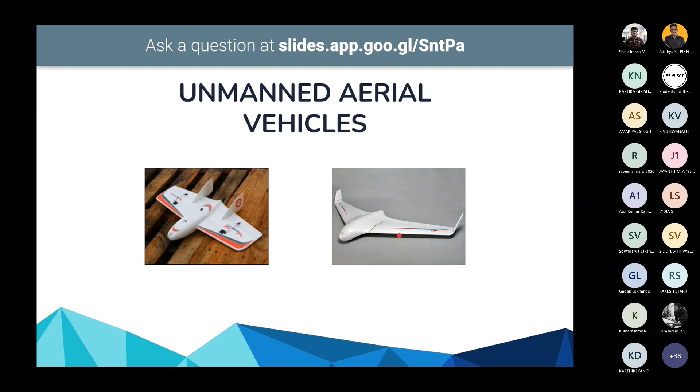Moving on from fixed wing designs, there are multi-copter designs, and this is what we specialize in. So a multi-copter design consists of multiple motors pointing upwards to generate thrust. So just like fixed wings, there are many variations of these designs. I can increase or decrease the number of motors. I could have 8 motors, I could have 4, maybe 3 also. And you can also change the arrangement of the motors.

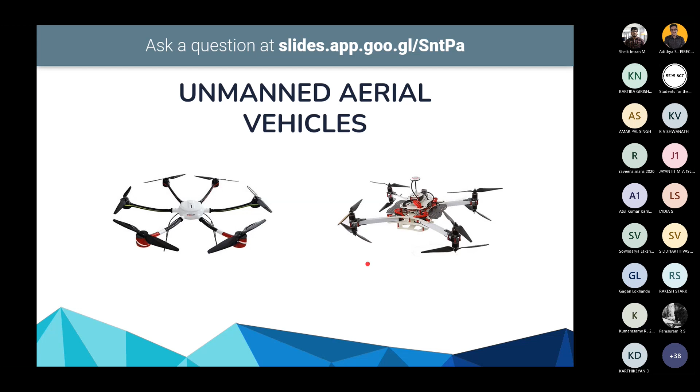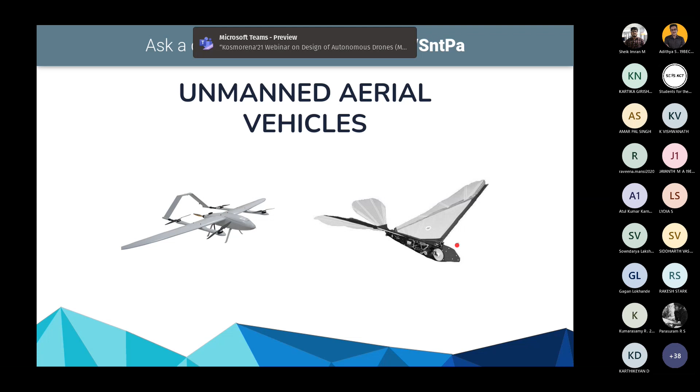There are other designs too, like RC helicopters, for example, which are very popular. They're essentially single copter drones, and they use a tail rotor to stabilize themselves in flight. And on the right, this is something I found really interesting. It's an image which looks like a bird, and this is called an ornithopter. So it's a lightweight craft which flies by flapping its wings. So just like this design here, there are many miscellaneous designs you can come up with for fun.

All right, so let's start to understand how multi-copter systems work and how we could build one. So let's start with the basics. Let's begin with the frame of a drone. So when we build a drone, we need to understand what we're building the drone for. So someone may want to build a drone to participate in races. Maybe they want to perform acrobatics or stunts in air. Maybe they just want a powerful drone to carry a camera with a gimbal for photography purposes. So each purpose will require a specific frame design.

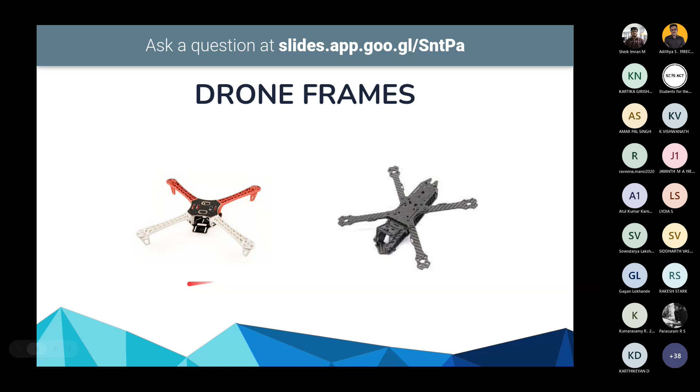So racing and freestyle drones tend to be smaller, and FPV drones, or first-person view drones, they can vary in size based on the camera being used. And then for larger setups where we use a larger camera and we need a heavy gimbal, we will need more powerful drones with larger frames. So commonly we build either quadcopters, hexacopters, or octocopters. Now their names reflect the number of motors present on the drone. So quad having 4, hexa having 6, and octo having 8.

So the main factors you want to consider when choosing from any of these frames are the drone weight, the battery weight, the payload weight, or the required flight time. So you have to try and balance these 4 parameters, and you have to see which works best for you. So let's look at octocopters. Octocopters offer a serious amount of lift. So because they have 8 motors present on them, this means you can lift a larger payload. But because the number of motors is higher, it means that the battery has to be more powerful and will be heavier. Additionally, the frame will also be larger, and that increases the weight of the drone.

Quadcopters, on the other hand, can be much smaller and much more agile. But again, the decrease in number of motors means the payload they can carry is much less. Individual skill is also something you should consider when you're picking a frame. So if you're not comfortable with your soldering and assembling skills, you should avoid using smaller frames, because when you're working in smaller and smaller frames, you're packing all the components present on the drone really close to each other. So that means you have to be very confident in your skills to assemble it properly.

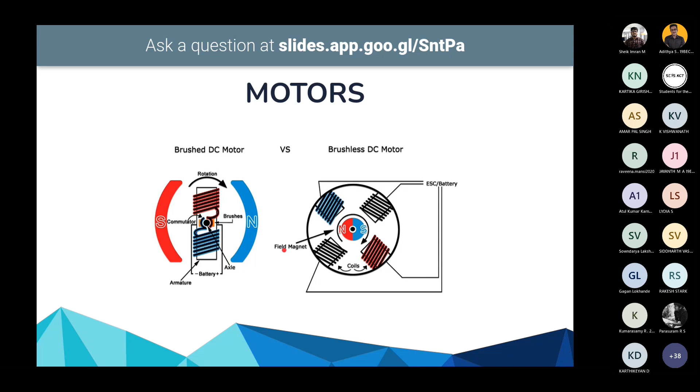So what's the difference between these two kinds of motors? Right now I have an animation of a brushed DC motor. As you can see here, in the brushed DC motor, there's going to be an armature which is rotating, which has coils wound around it. There's a commutator in the middle, which acts as a mechanical switch. We'll talk about this in a few seconds. There are brushes which connect the power supply to the commutator.

So what happens is when we supply power to the armature, a magnetic field is created and it begins to rotate. But at a certain point, it's going to stop rotating, and we need to ensure that we change the polarity, the current here in the armature. And that's why we use this commutator. It acts as a mechanical switch. So to ensure the full rotation happens, the commutator has a small split in between, and across that is where the polarity changes.

In a brushless motor, however, the rotor, which is the part of the motor which moves, is in the center here, and it has two permanent magnets around it. These permanent magnets are surrounded by multiple windings. For this demonstration, there are 3 windings, but in actual brushless or BLDC motors, you'll notice there are many more windings. BLDC motors are controlled by something called 3-phase power.

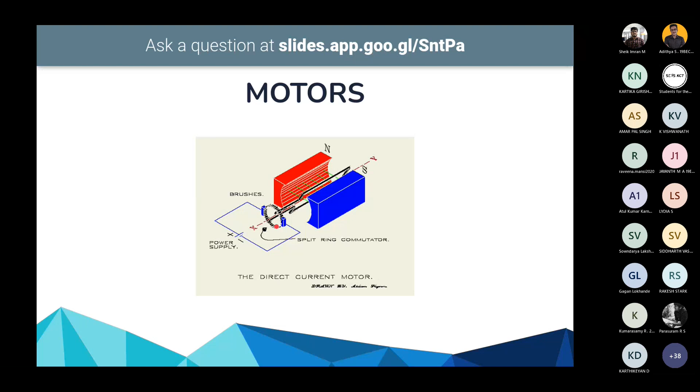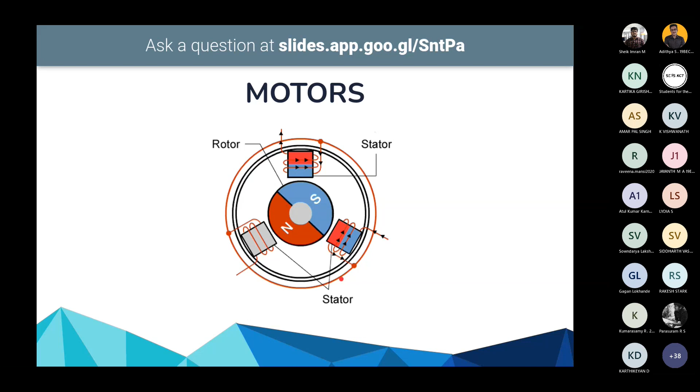With the absence of brushes, it also means that brushless motors will be more efficient. There are no sparks present, and the noise produced is also less. So therefore, we always go for BLDC motors, unless we're building really tiny drones. In such cases, we can see cheaper brushed motors being used. But when we're looking at BLDC motors, how do we compare them? How do we know which one's the best fit for our drone?

That's determined by something known as KV, or the velocity constant. The velocity constant tells us how much RPM we're going to get out of a motor. For example, let's say I have a motor with a KV of 2000, and I connect a battery of 10 volts to the motor. If you simply multiply these 2 numbers, you're going to get the output RPM. So for a KV of 2000 and a supply voltage of 10 volts, we're going to get an RPM of 20,000. And that's really high.

That's because this formula will give you the output RPM when there's no load connected to the motor. No load means that there's no propeller attached to the motor. It's just simply spinning the rotor. If we do attach a propeller, you'll notice that the RPM will decrease sharply. So the higher the KV, the velocity constant, the higher the current draw of the motor and the lower the efficiency. But how do we know which KV range to go for?

That depends on the number of motors on your drone. For quadcopters and tricopters, which have 4 and 3 motors respectively, you need a motor which has a high KV. But as you're working with drones with a larger number of motors, so hexacopters and octocopters, you can go for motors with a lower KV, because the motors can compensate for each other. Motors with a lower KV run at a slower RPM, but that means they can generate more thrust if you use a larger propeller. And motors with a higher KV are more suited for smaller propellers.

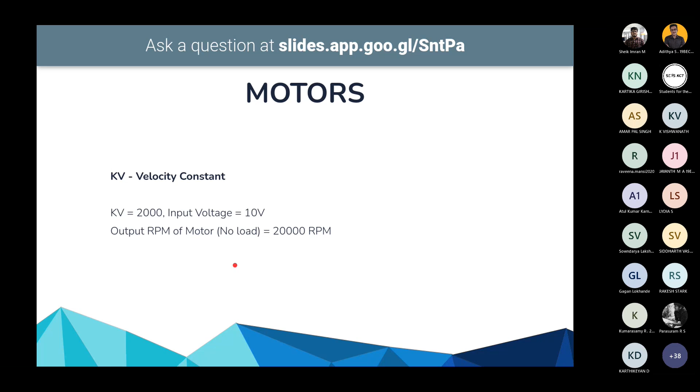All right, let's move on to the propellers. So propellers are what we attach to the motors to generate thrust. And while they may seem like simple components which we can just pick carelessly, I mean, they're just small bits of plastic, aren't they? Well, in fact, there's a lot of stuff we have to consider when choosing propellers.

So the first example is the length of the propeller. A longer propeller can generate more thrust than a smaller propeller at the same speed. But it does require the motor which is attached to the propeller to be more powerful because the motor has to provide more torque. However, this doesn't mean that a larger propeller will let your drone fly faster, and that's actually determined by the pitch of a propeller.

So what is the pitch or pitch number of a propeller? Well, it's actually the distance the propeller would move in one single rotation if you pushed it into a solid object. Now, to try and understand that better, try to think of the propeller as a screw, which you're trying to push into a block of wood. So the distance the screw would move in one rotation would be the pitch.

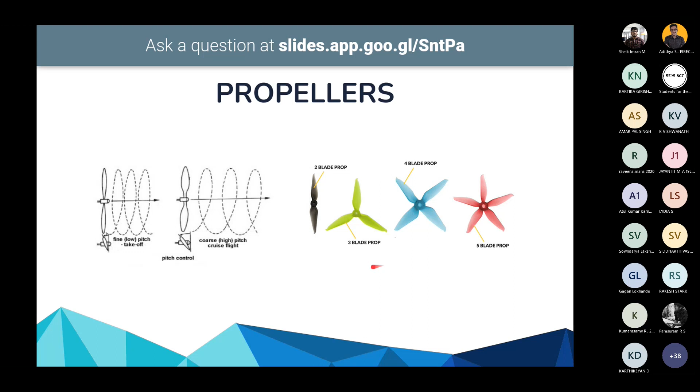So that means as our propellers are spinning, we are pushing air down to generate thrust for our drone to move upwards. But that means the air is also exerting a force on our propellers. Now, if all our propellers were rotating in the same direction, that force which air exerts on the propeller would slowly build up over time. And that would cause the drone to start rotating, and it would end up crashing, which is not good.

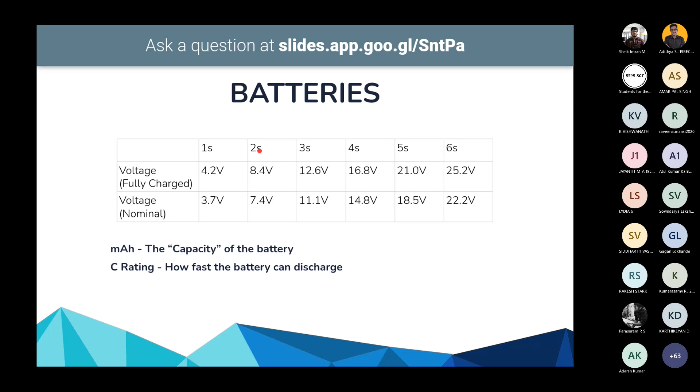All right. So we've talked about batteries and we've explained how they're connected in series. But sometimes when you want to provide higher current, what you need to do is connect your batteries in parallel. So similarly to how we denote series using S, we denote parallel using P. So you may see 1P, 2P batteries. So that's 2 cells in parallel. You can have 3P, 4P, and so on.

All right. So earlier we mentioned that brushless DC motors need to be controlled by a controller to ensure that they rotate properly. And that's what the ESC, or the electronic speed controller, does. The ESC has a microcontroller present on it, which operates different ICs on the ESC to convert the DC power, which we get from the battery, into 3-phase power for the BLDC motor. And it does so by taking inputs from the flight controller. We'll be talking about the flight controller later on.

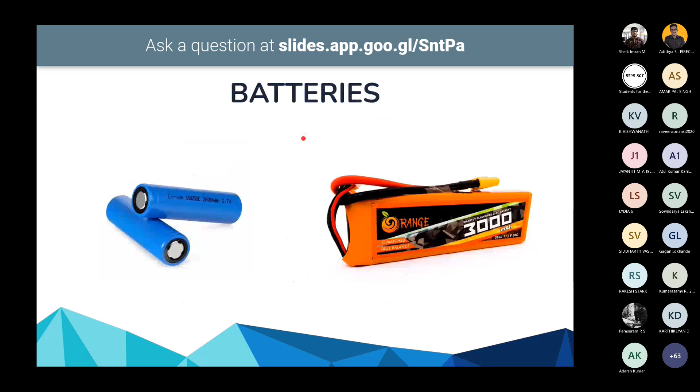So as the ESCs use 3-phase power, if we switch any two of these connections, we're going to end up changing the direction of rotation of the motor. So for example, let's go back to a previous slide. Let's say I've assembled my quadcopter, I connect the battery and I notice that motors 1, 2, and 4 are all rotating clockwise. Well, motor 2 should be rotating anti-clockwise. And the quickest way to fix this is to simply change the connection from the ESC to the motor. So just by changing any two of these, you can change the direction of rotation. And this doesn't harm the motor in any way.

All right. So as each ESC has its own microcontroller on it, you can have firmware running on the microcontroller. Some popular examples are SimonK and BLHeli. These firmwares are responsible for the smooth operation of the ESC and for the proper handling of the motor. With some ESCs, you can even upgrade the firmware to newer versions. Now, built into these firmwares can be different modes and settings for the ESC. So for example, you can have brake, soft start, and low voltage. These modes can affect the performance of the motor and change how it functions.

So for example, the brake setting makes the motor stop immediately if we lower the throttle. Normally, if on my remote control I set the throttle to 0, your motor would spin slower and slower until it stops. But if you have your brake setting active, your motor is going to stop immediately the moment you set your throttle to 0. This has a few applications when you are working on gliders. For example, if you want your motors to tuck away into the frame, you want to stop their rotation immediately.

So something very important we have to do with an ESC is calibrate it. By default, when you get an ESC from a manufacturer, let's say I ordered one online, when it arrives it's not going to know the full range of the throttle that your transmitter, your controller, is going to use.

So because of this, it can result in some issues. So let's say, for example, I fly my drone without calibrating the ESC. That means that you're going to have different motors spinning at different speeds. So the drone's not going to function properly and it could crash. And otherwise, because it's not flying properly, you'll end up putting more strain on the motors and you could end up damaging them.

Another issue you'll notice is if you don't calibrate it, but you increase your throttle by a very slight amount, then you'll notice that maybe 3 of your motors will be spinning, but your 4th motor won't be spinning. And that's, again, like you can see in the image, because the throttle range of the ESC on the left is not matching the throttle range of the transmitter control on the right.

So these two images are a before and after of your calibration. So after you've calibrated your ESCs, it's going to match your transmitter control throttle range. And that means all your motors will be working in sync. They'll always be at the same speed.

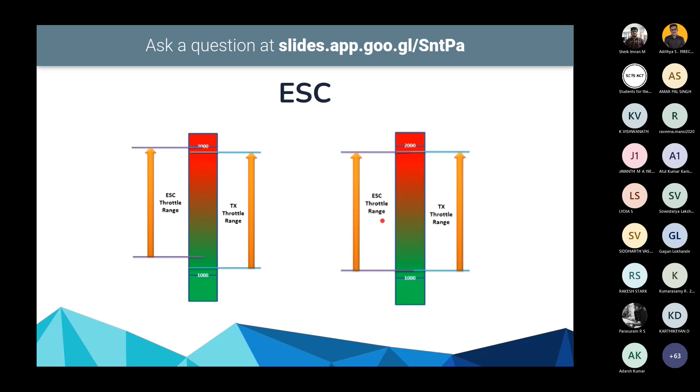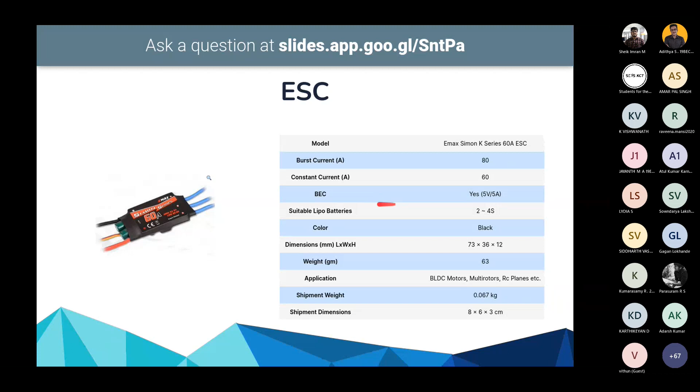So some speed controllers will already have a battery eliminator circuit in them. So for example, this one here, it says it has a BEC, and you can see its output here. And if we go back to our previous picture of an ESC, you can see this output here, which I skipped over earlier when I was just explaining the ESC. This is actually the output of your battery eliminator circuit. So it supplies a ground connection, a plus 5 volts, and there is a connection for a signal pin, which is basically how your ESC is controlled.

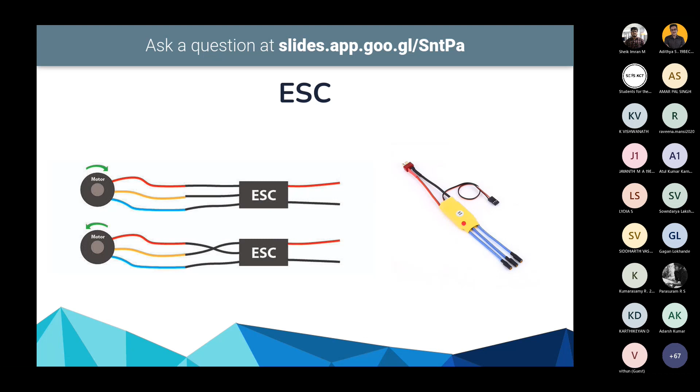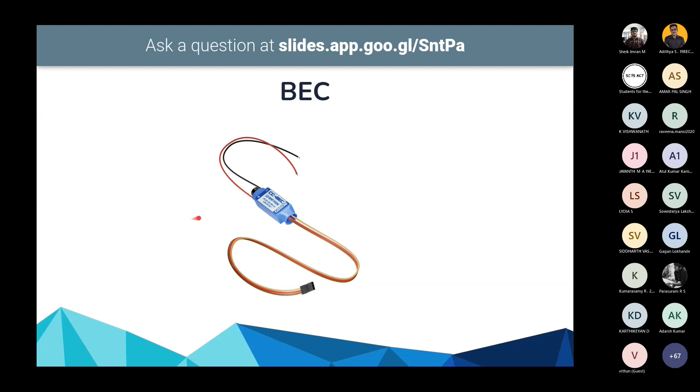However, you don't have to rely on the battery eliminator circuit which is present in your speed controller. Sometimes when you're using a speed controller which is rated for high current draw, there's a chance that a BEC may not even be included. So always check specifications before purchasing. And additionally, you may have different components which require different levels of voltages. So you may need to use separate BECs than the one which your ESC has.

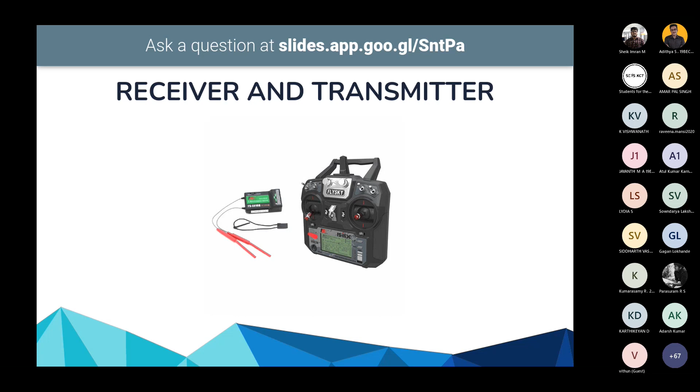Your transmitter is essentially a handheld remote. There are 2 sticks present here to control the various movements of the drone. And different transmitter models will have a varying number of switches present on them. Some will have knobs, and some of them even have on-screen displays. Some of them might not have this, and it makes them a bit harder to use.

So transmitters have something called channels. Right now, if you go on Google and you look for transmitters for drones, you're going to find websites saying 6-channel transmitters or 16-channel transmitters. So what does each channel do, and why do we need so many? Well, a channel is used to control a specific function of your drone.

So if I increase it, my drone will start speeding up and it will be at max throttle. If I set it to 0, my motors will stop moving. Similarly, you can assign the left and right movement of your left stick to yaw, your right stick up and down movement to pitch, and your right stick left and right movement to roll. And it's not necessary that you have to configure your sticks in this way. Different models like fixed wings and multi-copters will have different settings. So always go with what's recommended for your specific frame.

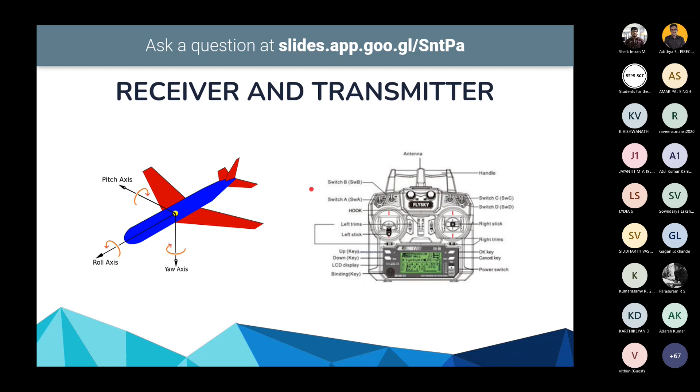Okay, so we have our transmitter and we have a receiver and we have a way to control the drone. But where does all this data of my stick, of the movement, or what I'm controlling go? It's not like we can connect our receiver directly to the motors. And that's where the flight controller comes in. I've already mentioned the word flight controller once or twice in this session, but we'll be talking about it in detail now. You can think of the flight controller as the brain of your drone. It takes in the input from your receiver and converts it into an output which goes to the different motors or the different ESCs.

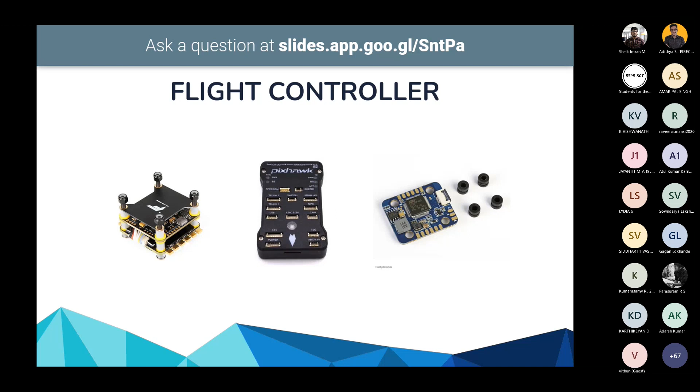All right, so throughout this entire session, we've been discussing how to manually fly the drone. But what if I wanted to make the drone fly itself, if I wanted to make it autonomous? And that's where the autopilot comes in. So an autopilot is a firmware which we can flash onto our flight controllers, so it can do the job of piloting the drone for us. So there are a few autopilot softwares which I just wanted to mention today because they're the most relevant ones when working with drones. So we have Betaflight, iNav, and ArduPilot.

Betaflight is primarily used for racing quadcopters. It's designed for that, but because of that, it's not good for any other applications. So if you are using a racing quadcopter, stick to Betaflight. iNav, on the other hand, is very good with fixed wings and good with drones too. And it works very well with the GPS, but it's not good at handling racing quadcopters. That's the difference between Betaflight and iNav.

ArduPilot, on the other hand, is an open source firmware. It's designed specifically for Pixhawk controllers, but it does support other flight controllers too. And because it's open source, there's an entire community working behind ArduPilot, adding new features to it. And because of that, it supports a lot more hardware models than other autopilots would. And it also works really well in all kinds of systems.

So for example, there are different variations of ArduPilot. You can use ArduPilot on drones. There is Arduplane for fixed wings. And you can even put this ArduPilot on rovers and submarines and even on balancing bots. So you can see it's really versatile compared to these two autopilots.

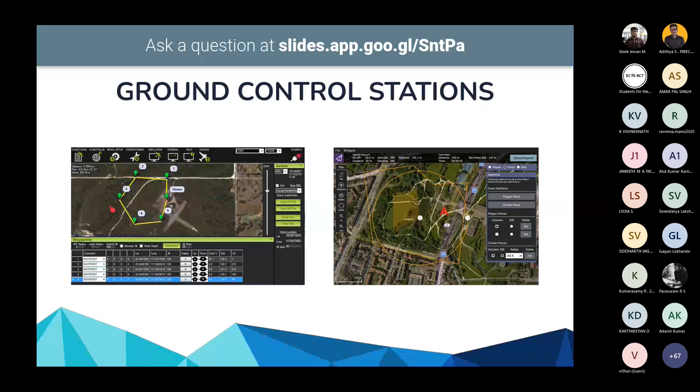So with a telemetry setup, you can see details about the drone's current flight on the ground control station. So for example, you can see altitude, the orientation of the drone, the speed it's moving at, the current flight mode it's in. You can even update flight modes, and you can make the drone perform interesting acts. So for example, I could go to the ground control station, I could click anywhere on the map, and I could have the drone fly over there. So having a telemetry setup is really powerful.

Otherwise, another thing I could do is if I'm done with flying my drone for the day, I could click on return to launch, and that will make my drone come back to where it launched from and land again.

So the telemetry communicates with the drone using communication protocols, and one example of a communication protocol is MAVLink. MAVLink is very powerful, and you can use it to even program the drone to act the way you want it to. So using softwares like DroneKit or MAVROS, it really unlocks another realm of possibilities with drone technologies. If you do go on YouTube, you can find videos of people programming their drone to follow them as they're moving around.

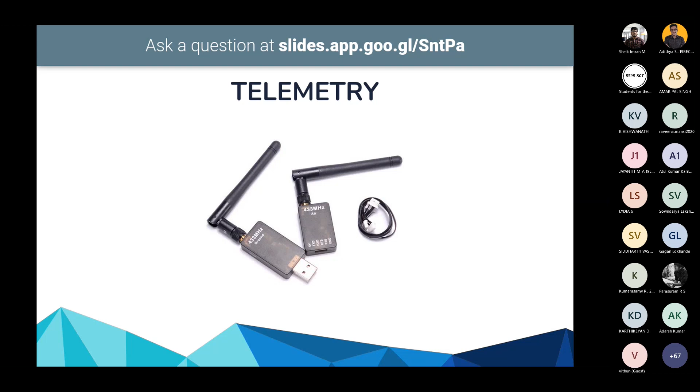All right, so since Space Week is going on, we thought we'd talk a bit about extraterrestrial flight and the kind of decisions an engineer or a scientist would have to make when changing the kind of models we've discussed, like fixed wing or helicopters or multi-copters, and how to adapt them for extraterrestrial flight. So, well, we all know about Ingenuity. It's the most popular, the only powered helicopter on Mars right now, and it's definitely trending everywhere.

So Mars has several conditions which make it very difficult to fly on. So for example, the Martian atmosphere is 0.6% of Earth's atmosphere. That makes it very difficult for us to generate thrust. There are fluctuating temperatures on the surface of Mars, so that will damage your battery and will affect its lifetime. And there is one advantage to flying on Mars, and that is that the gravity on Mars is 38% of our gravity on Earth.

So before we talk about Ingenuity and the decisions they made at NASA to make the Ingenuity helicopter fly, we'll talk about the different designs we've discussed in the session and see whether they would work or whether they wouldn't work on Mars. So first we talked about fixed wings. So could we use fixed wing on Mars?

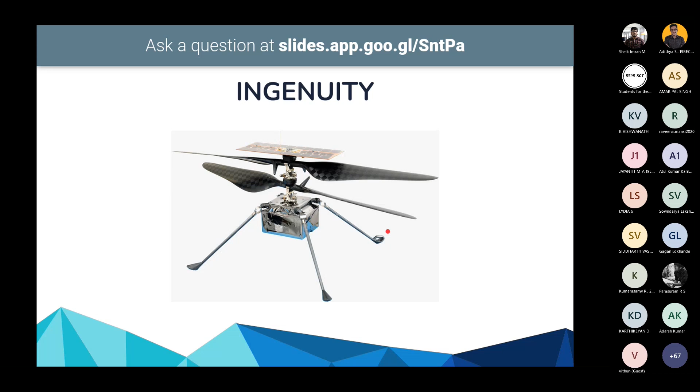Well, something interesting they had to do was test the helicopter. How do you really test something meant to fly on another planet? In their Jet Propulsion Laboratory, they have something called the 25-foot space simulator, which allows them to simulate any kind of atmosphere. But how do they simulate the effects of lower gravity? For that, they've attached a fishing reel, and used a sensor and a motor to detect the movement of the drone and compensate, to reduce the weight. And that's how they test for the gravity.

Yeah. So if you go online, you'll have to refer to something like this. It's a lot of decisions and it's a lot of experimenting you'll have to do. And there's another question about someone asking about ground control stations. I'd recommend trying out Mission Planner. That's the one I've worked with.

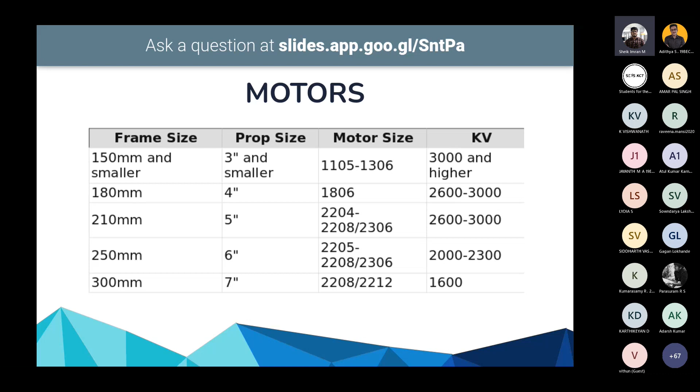If you want to dispose of a puffed LiPo, in different cities you'll have different locations for disposing of electronics. You will have to go dispose them there. And yeah, again, for ground control station software, I'd recommend Mission Planner. It's the one which I used a lot and I personally really like.

Hello, sir. Am I audible? Yeah. Hello, sir. Yeah, you're audible.